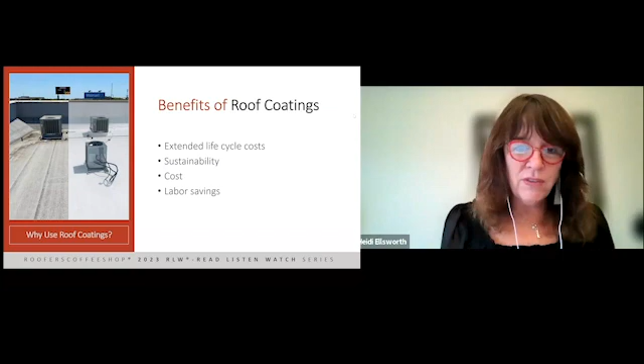And we just had a comment come in from Kyle. Thank you, Kyle. It does help with labor costs because you can get people trained up faster. The skill level is not quite as intense or advanced. Like you said earlier with cost and labor savings, that makes a big difference. Yeah, absolutely.

Okay, well, let's go on then and talk a little bit about best practices. We know why it's good. We know why we need it. And so what are best practices for roof coatings overall, assessing roofs?

Yeah, so the big thing is that visual inspection. So the first thing before you ever step foot on the roof and figure out, okay, is the roof dry and sound, is you want to do an examination underneath. So you want to walk that building from the inside, especially if it's open, to be able to see if there's any damage to the roof above you, because you don't want to go walk on a roof and it's rusted underneath and potentially have an injury or even worse. And so you always want to examine that roof deck from underneath if possible.

And so from there, then you get on the roof and you're looking at the age of the roof, what materials were used, the previous maintenance history, and then you go even further and you look at moisture intrusion, leaks, how many roofs are currently installed, check the drains. So you're trying to make sure that you have a dry and sound roof. If you install a roof coating over a wet roof, 99% of the time it's going to wind up failing.

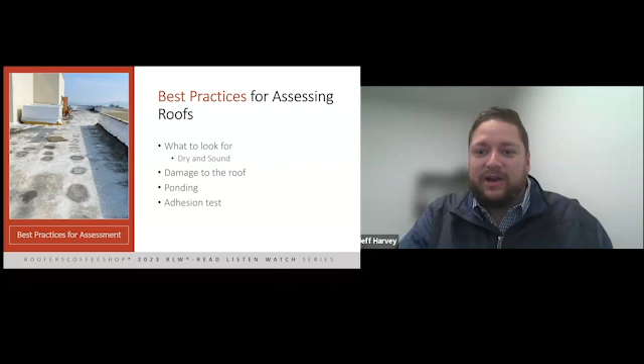And so when you're doing an adhesion test, 2 pounds is really that ASTM standard. 2.5 pounds is what we like to always strive for. I see a lot of people doing it wrong, as Kyle said in the chat, but there is actually an ASTM standard for that. Excellent. Excellent. Okay.

Well, then let's move on to look at the challenges. And this kind of goes to what everyone's talking a little bit about: roof challenges. So if you can kind of talk through what are some of the things that people should be aware of as they're getting ready to recoat or coat.

Yeah, absolutely. Thank you, Mike Wallach. I see that ASTM number.

So roof challenges, we've already talked about some of them. Moisture in the system. For a roof coating, if you have moisture in the system, that's the worst thing that you can have. Is it a bad thing? Yes. Can it make it so that you cannot coat that roof? No. So what we would have to do is remove that wet insulation and replace it with like materials, go back through and continue with your installation. That touches on the portions of the roof that need to be removed. It all kind of ties together.

Active leaks, we want to address those before we go and just put a roof coating on top of it, because sometimes that roof coating can't fix that specific leak. And so we want to address that leak before we go ahead and coat it.

So rusted metal roofs, you've got to treat rust or else it's going to continue to happen. That's a big challenge, but if it's surface rust, that's one thing, but if it's rusted all the way through, completely different circumstance. So that's why we always encourage, especially on metal roofs, that roof deck inspection.

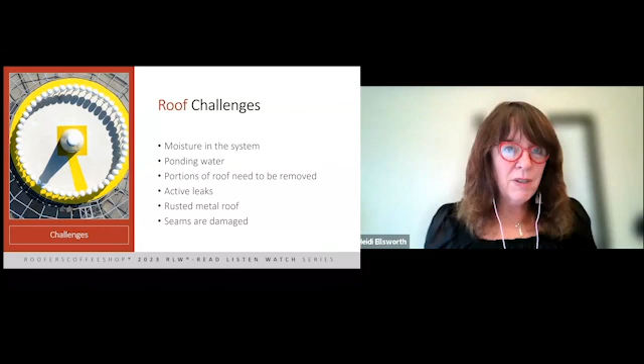Yeah, absolutely. And then one of the last points, seams. Your number one failure points on roofs are going to be seams and penetrations. So making sure that you're addressing all of those seams and that you don't overlook any of them, because that's really where those leaks are going to come from. Excellent.

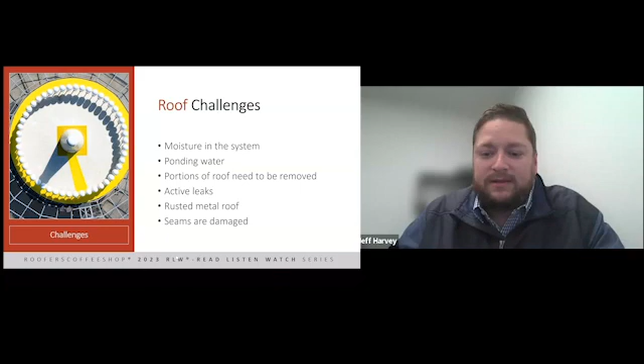So when to coat versus re-roof. So how do you have this conversation, and how do you really determine what's best for the owner and the roof? Yeah, so it all starts with what the owner's goals are for that building. So having that conversation, is it a building that they're looking to sell? Are they going to be a long-term tenant? What's going on inside their building?

Roof coatings have minimal disruptions to the building occupants inside, and so sometimes if you have a building where you can't have that disruption, this is going to be key: okay, a coating might be a better option if your roof is a candidate. And so just asking that owner what their goals are.

Coatings have very easy transferable warranties. And so that helps. Okay, a building owner is trying to sell the building in the next 2 years. So we go in and we get them a roof coating with a warranty, and they're able to transfer that warranty at the sale.

The other thing is, they're going to sell that building. They don't want to put a full re-roof on it. So if they can save 50% and still give a good solid warranty on that sale, that's a big thing. So owner's goals, just finding out and understanding, asking those qualifying questions is going to be huge. And then, once you find out their goals, you can start to dig into some of these other things.

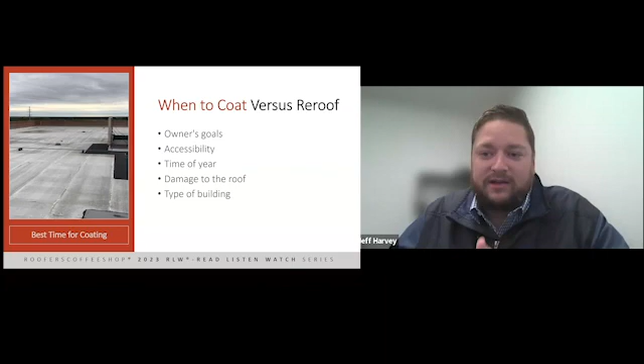There's been circumstances where I've been on a roof that received hail damage, and there was rain coming in within the next 2 days, and it was a data center, and so you can use roof coatings as a repair. And so we were able to go up there and dry in that roof to ensure that that data center underneath didn't have any shutdowns or any disruptions or moisture intrusion whatsoever. So, yeah. Very important.

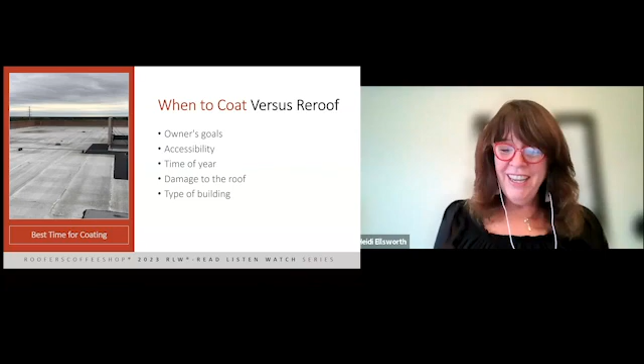So as we're looking at this, what roof works better for roof coatings? A lot of people at one point, maybe 10, 20 years ago, were just like, coat everything. But really, certain roofs work better than others. So let's talk about that. Yeah, absolutely. So, as you just touched on, coat everything. Most roofs can be candidates for coatings, but you have to go through all those qualifying stages to find out if that roof truly is a candidate for a coating.

So, if the roof is saturated, what's that percentage look like? Is it 40%? Is it 20%? Is it 10%? Is it 80%? So all of those things help make that decision on if the roof can be a candidate for a coating. The best roof would be the roof that has been well taken care of. Little to no squares need to be replaced before coating. It's nearing the end of its roof life and has zero problems. Those are the best roofs to coat.

Somebody that's actually taking care of their roof, because what we're doing is we're going to come in there, restore that roof, and give them another 10 or 20 years before they have to touch that, as long as they continue maintaining that roof. One of the things we haven't touched upon, and we'll talk about it later on, is care and maintenance, and selling those programs. So be proactive, protect those roofs that you've made that investment in.

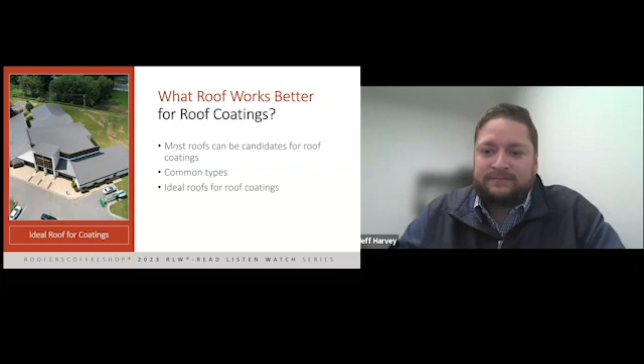Right. And when we talk about... oh, you did. I'm sorry. We already talked about that. So we're going to move on. And we have lots of great questions coming in. I love this. Okay. So how to know which type of coating systems to use. So let's work our way through this. And we actually have some questions over here that are going to fit perfect with this slide. Awesome.

So, the coating systems that we currently have are silicone and acrylic based coating systems, but then we also do spray polyurethane foam, and then we do full fabric reinforced systems. And so we can do both of those, spray polyurethane foam and full fabric reinforced, with a silicone or an acrylic coating. And so when you would choose a silicone coating over an acrylic, it is going to be based on what that roof is telling you.

And so typically on any flat roofs, no slope whatsoever, we're going to recommend silicone because, as I discussed earlier, silicone is unaffected by ponding water. And so eventually, regardless of how good your install is, there will be some sort of bird bath or ponding water on that roof 10, 15, 20 years down the road. So that's why we always typically try to recommend silicone when it comes to a low slope or flat roof.

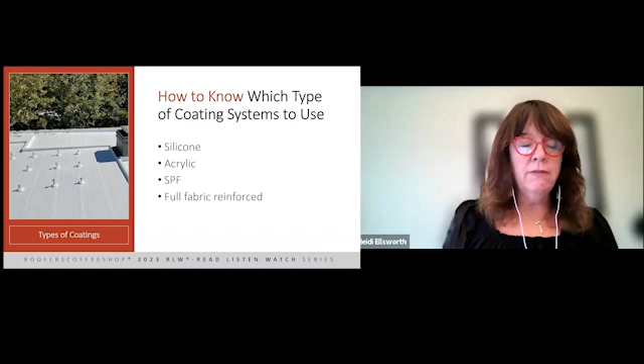So, following up on your question about the silicone getting dirty, it was, how do you clean a silicone roof? Just power wash it? Yeah, you don't even need to power wash it. You can just take a soft wash to it with a soft bristle brush and a light cleaner, and that's going to come off, because technically that dirt isn't sticking to that silicone, it's just kind of laying on top. And so even just a light soft wash will get that bright white again.

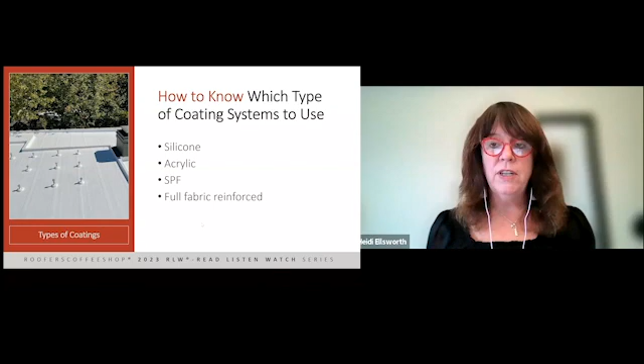Okay. And then we did have another question that just came in from the chat from Kevin. Thank you. He said, good afternoon. How does one conduct a recoating of an existing silicone roof coating when silicone is a complicated substrate to achieve a bond to? Yeah, so one of the things when we developed the silicone that we have is we wanted to be able to maintain not just our silicone, but also existing silicone, because that's one of the biggest pain points with silicone: what do you do once you've installed it?

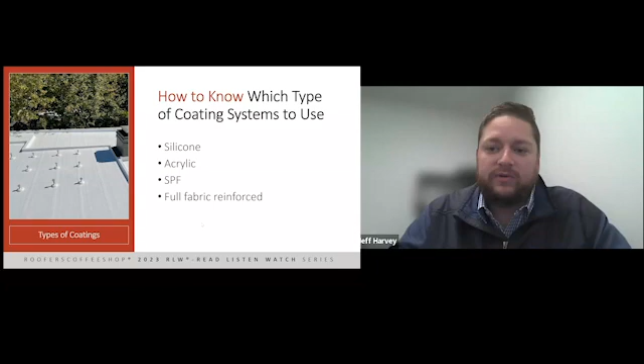And so what we recommend is, go out there, clean that roof in a small area, put an adhesion test patch down, and check what your adhesion is. We're one of the few, and one of the only ones that I know, that has third-party testing over existing silicone roofs, and have specifications where we can write warranties over those existing silicone roofs.

Excellent. Okay. Well, good. That led us perfectly into our next topic, and that is the importance of preparation.

And so overall different types of roof systems. So let's start with that, Jeff. Yeah. So, we talked about that visual inspection is very key. But surface preparation and the detail work is the most important. So we've talked about moisture analysis already. We just talked about compatibility of the old roof with coatings, and so looking into those adhesion tests.

That's very, very important to make sure that you have proper adhesion, especially if you're doing an existing silicone, or you're doing a single ply that you don't know the exact age of, because of all the plasticizers and everything else that goes into some of those single ply roofs. You want to be able to ensure that you have that proper adhesion. And so cleaning that roof.

So I'm not just talking about the pressure washing or getting the granules off, going through and making sure that you've trimmed the trees back, that no tree limbs are hanging onto that roof, and as the wind blows, they're going to sit there and they're just going to scratch away at that roof. And you want to make sure that you're doing that prep work around the building, along with cleaning it with a pressure wash.

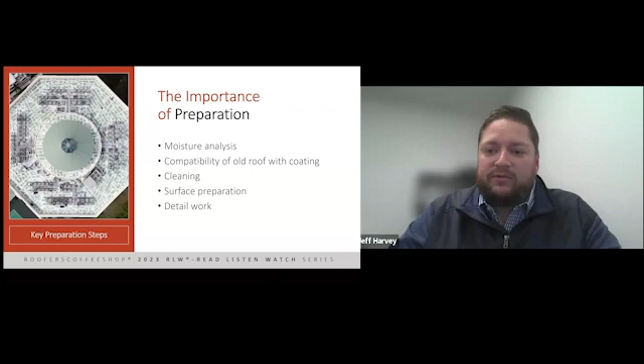Excellent. Keep those questions coming. These are great. So let's go in and let's talk about the importance of documentation. I think, really from a risk mitigation standpoint, it's so important for contractors. So let's talk through this, Jeff.

Yeah. So importance of documentation: we talked about moisture levels. We talked about getting those thermal scans or any moisture testing done. That's going to be able to say, hey, this roof had 10% moisture. We cut it out in these areas and we replaced it with like materials. We're good. And so it allows us to be able to issue those warranties, and also gives you as a contractor peace of mind that, hey, I eliminated those areas that had those issues.

Wet mil reading documentation. So taking those wet mil samples as you're going through that roof, and checking every couple of feet as you go, to make sure that you're getting those proper wet mils, to ensure that you're getting the warranty term that you're trying to get. You want to do that at the beginning and not at the end. When we come to do slit samples and you're short, we're going to say, hey, you need to add more product, and nobody wants to go back and do work twice.

So wet mil reading documentation, taking the photos, documenting it each day in each area that you're doing are key, because when we go up there for that warranty inspection, we're going to ask for those things, and we're going to take slit samples. And let's say there's an area where it's like, hey, you're a little light here. You can say, well, I've got my wet mil readings in this area, and go through that. So documentation is huge. It helps protect everybody.